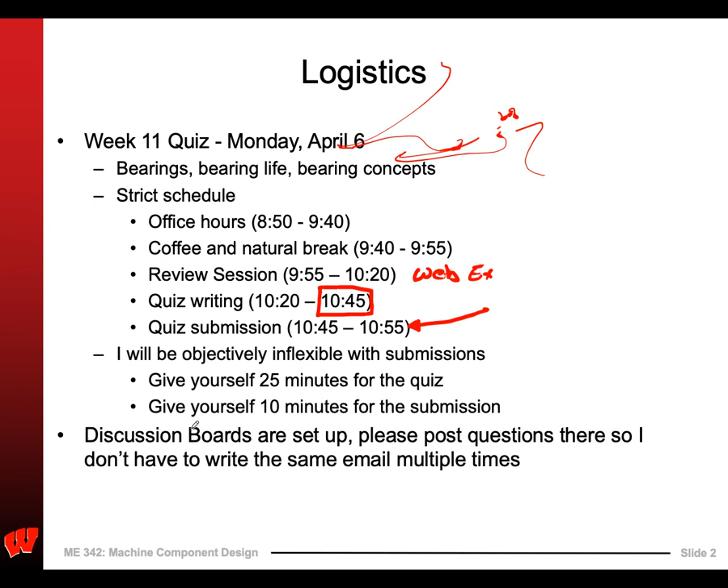Okay. So the shaft basics, right? We've been talking about these all semester, but it's probably worth mentioning a few things here. Usually relatively long round pieces that rotate and transmit power, right? But there's always a but, right? It could remain stationary. We've done quite a bit of work with spindles and axle stubs, where the axle is just stationary and the wheel spins on top of it. It might not be round. It might be flexible. So the tool your dentist uses, a lot of times those are air tools, but oftentimes they're also driven by a flexible shaft, and the attachments for your Dremel, so you can get into weird corners and stuff like that.

A few items that are commonly mounted on the shafts: gears. We've talked about that. Sprockets, and this would be not the Saturday Night Live skit, but for chains. Okay. And then, wow, this is just not going well. Let's see how that goes. Okay, pulleys. That would be for belts. I wonder if I just don't push down as hard, if that works better. Brakes, clutches. We'll talk about those later in the semester.

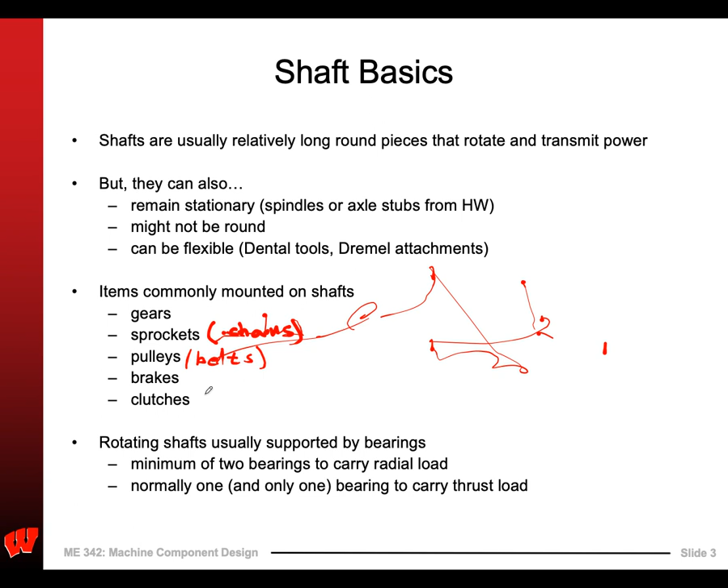So the rotating shafts are usually supported by bearings, right? Minimum of 2 bearings to carry the radial load, because the bearings can't carry moments very well. At least they shouldn't. So we have 2 bearings so that there's no moments.

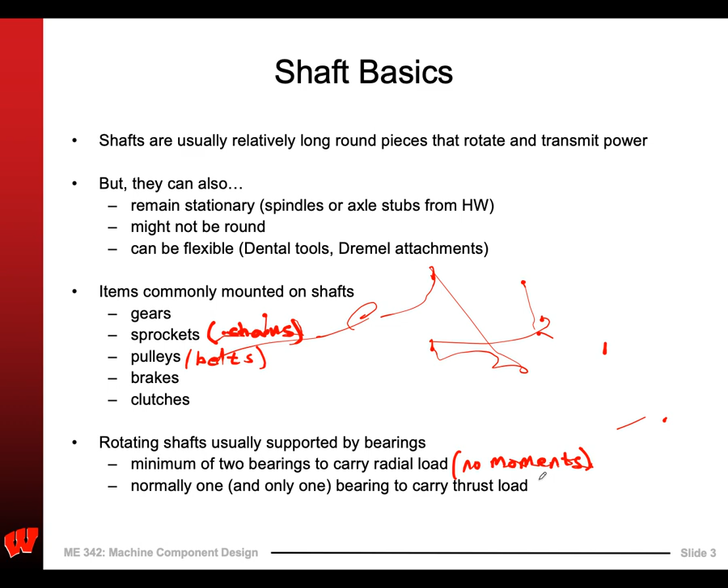All right, like that. And then normally one and only one bearing to carry the thrust load, right? We're not going to really do thrust bearings too much, so I'll just leave it at that. We've got a picture later on.

Shaft design. All right, so here's two different kind of versions of a shaft. Now in this situation here, we've clamped the shaft. So this is like an axle stub, where there's some sort of hub, or in this case, it's a chain sprocket, right, that's mounted on two different bearings, right? And then so the hub is allowed to rotate relative to the shaft, right? And the shaft has some components here.

Here's another example where here's the fixed part, right? This could be the axle, or the trailer frame or the auto body or something like that. The whole shaft rotates, and then the chain spins on there, right? So this has important implications, right? Which one of these has a static load? Which one of these has alternating load? Which one has a mean load? So these are two very different approaches to doing the same thing.

Things to consider. Of course, we have to consider static stress and fatigue. So this is the stuff that you've looked at heavily for your project. All right. And then, so some other things to consider are deflection, right? Why would I worry about deflection? Because if you've got bearings here, bearings don't handle being out of alignment very well. So it may be a situation, or maybe a very precision application where deflection would be bad.

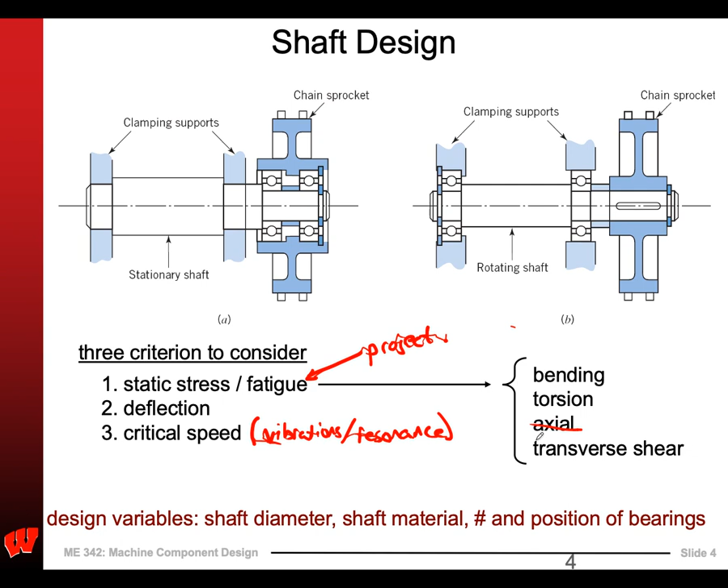Also critical speed, right? So that would be vibrations slash resonance, right? So that's stuff to avoid. But again, our project mostly revolves around this, and we're bending, torsion, axial, and transverse shear. But for the project, we don't even worry about that too much. Okay, and so yeah, that's good for that.

Okay, now, so there's two really important things we have to think about when we're designing shafts. The two things are, how do you hold the shaft components in place, right? So I have no idea what's going on here, right? I mean, what are these things? Probably some sort of pulleys with some sort of belts going on. How is this balancing here? That doesn't make any sense. So there must be something there, maybe some bearings. What keeps us from sliding back and forth, right? So the whole shaft can't slide back and forth. The pulleys can't slide back and forth on the shaft.

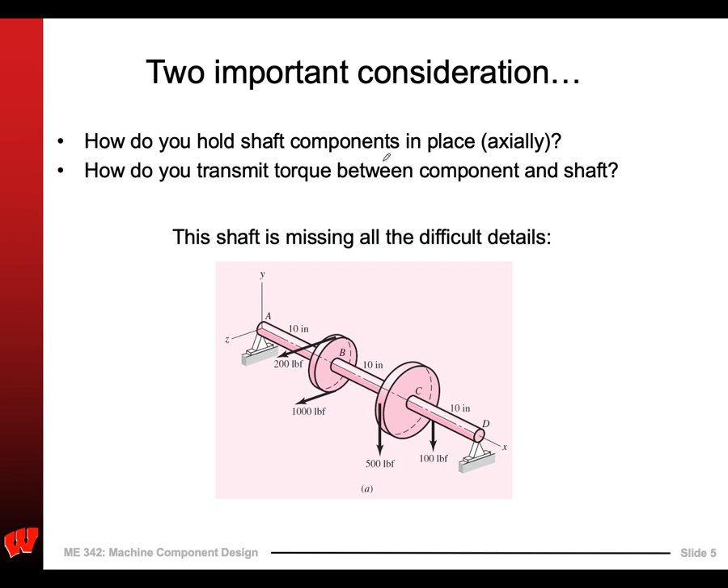Secondly, how do I transmit torque between the component and the shaft? Right? Is this welded on in place? Is this all machined out of one big chunk? Is this 3D printed? Or somehow is there something that attaches this pulley to the shaft so that the torque can be transmitted, right? Otherwise, the pulley would just spin relative to the shaft. All right. So, holding things in place axially, holding things in place rotationally, or transmitting torque.

Right. More realistically, this is what it looks like. So here is a shaft. Wow, this looks a lot like the counter shaft from your project, right? Where you've got some bearing here, you've got some bearing over here. What holds this bearing in place? Oh, there's a little shoulder there. It seems like we've done a lot of problems with shafts and shoulders, right? So there's a shoulder there that holds the bearing in place.

And then there's some other weird stuff here. What is going on here exactly? I don't know. And then some other, actually similar sort of weird stuff here. Some weird stuff going here. We got a shoulder here. Okay, that's nice. We've studied those. The shoulder holds this bearing in place. I don't know what that's all about.

So that's, whoop. Come on, stop doing that.

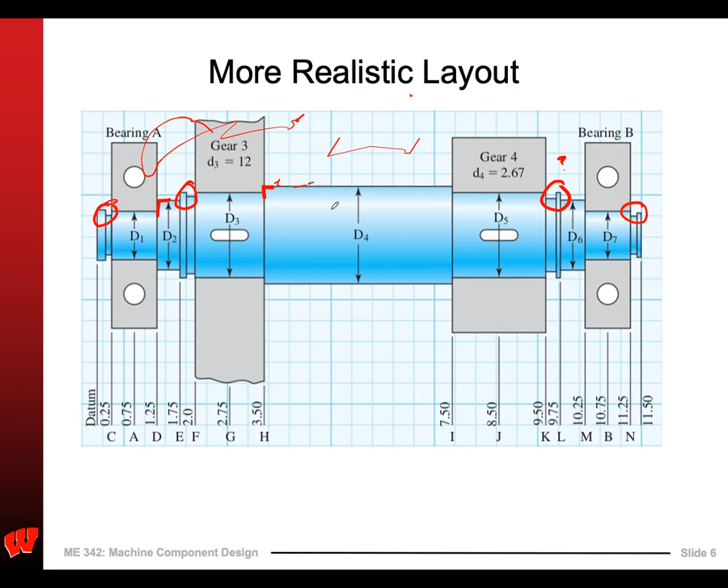So this is what a real shaft would probably look like. All right, it's not going to look like just that simple picture on the previous slide. Okay, so here's kind of a little summary. Common components include, right, gears. Yeah, that's what we're doing. Sprockets,